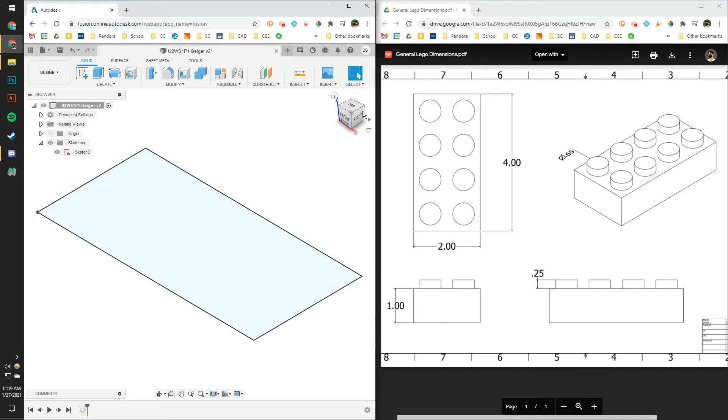And so we'll see now that if I zoom out, I have a 2x4 rectangle, and if I click Finish Sketch in the top right, it just looks like a rectangle. At this point, I'm going to click the house or the home button in my view cube section, and that's going to allow us to get an angled view, which is very helpful when we're considering a three-dimensional object.

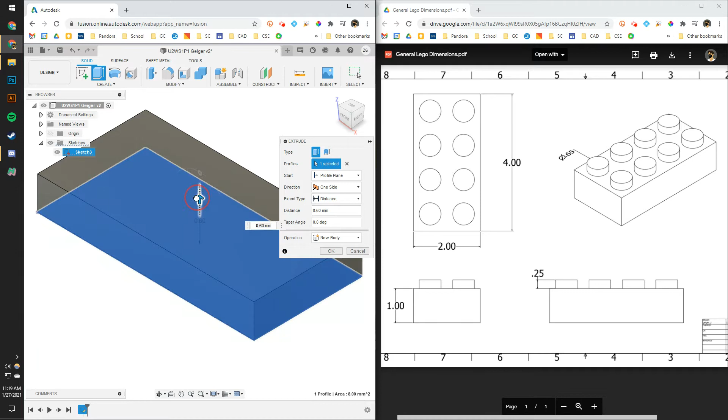Next, I'm going to click Extrude, which is probably the most used tool in this course. When I click Extrude, it's going to take that two-dimensional shape and pull it into a three-dimensional space. And so I can use this blue arrow to click and drag, or I can just type the number into this text box, which if I look at the drawing over here, the height of the Lego is 1. So I'm going to click 1 and enter, and now I have a rectangular prism.

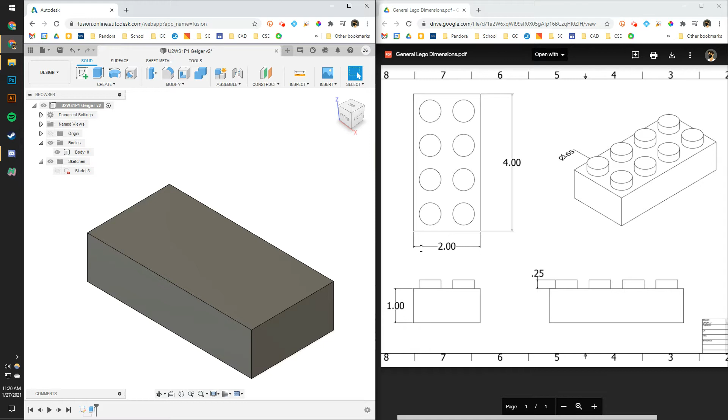The next thing we have to do is draw these cylinder bumps on the top of the Lego. And in order to do that, I need to draw all of these circles on the top before we extrude them. So unlike the first extrusion, now I'm going to right click on the top of my rectangular prism, because that part of the shape is where I want to draw this new sketch. And I'm going to click Create Sketch, and it's going to zoom me in onto that part of it. So I'm actually drawing on this level and not on the bottom on that XY plane like we started.

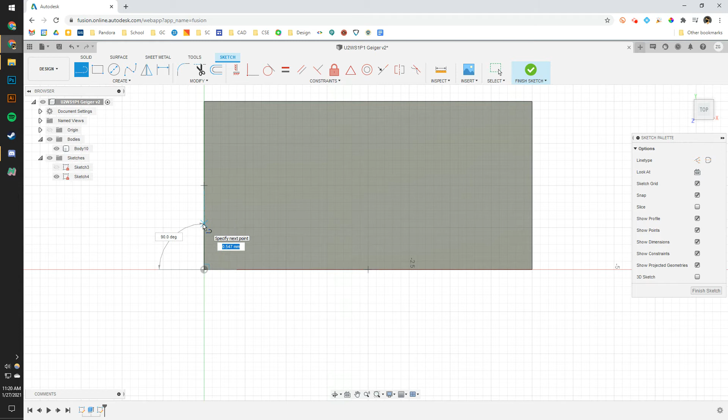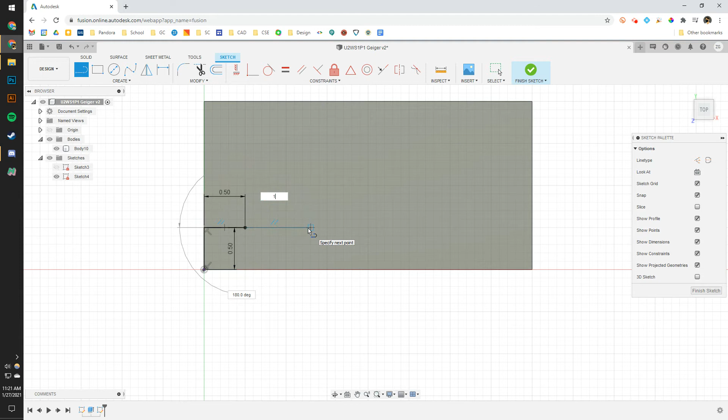So here I'm going to use the line tool, and I'm going to go 0.5 in up the edge of the shape. Instead of clicking the line tool, I can also type L, and that will make the line tool be selected for me. And then I'm going to go 0.5 inward as well. And then from the end of that line, I'm going to make line segments that are 1 millimeter long. I'm going to make sure that I move my cursor so that I can tell the program what direction I want the lines to go in, which is horizontally.

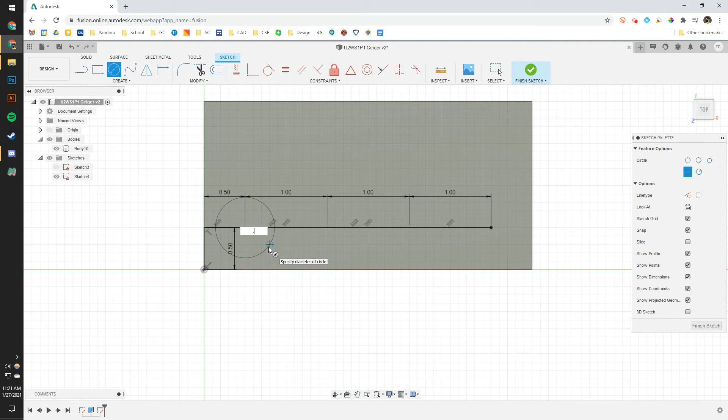Now, none of these lines are actually going to be extruded to make a three-dimensional aspect of the Lego, but all of them are going to help me plot my circles in the correct spots. So at the end of each of these line segments, we're going to put the center of the circle. And when I click the center of the circle, it asks me what diameter I want the circle to be, and for that, I'm going to click 0.65. So I can click the C key on my keyboard or click the circle button in the top left and make these circles. And I'm going to repeat that entire process on the top half of my Lego.

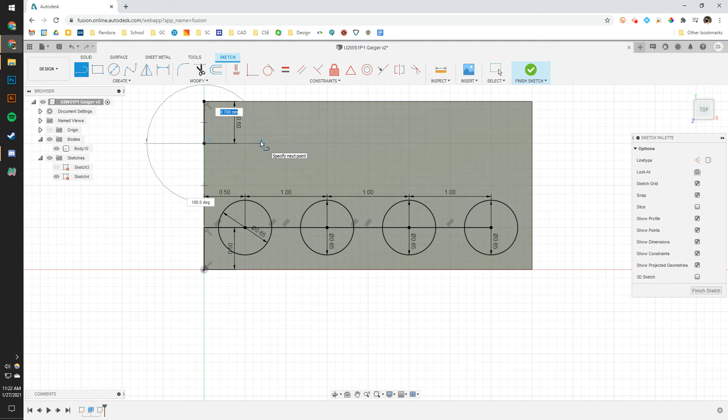So 0.5 from the top, 0.5 over, and then 1 over 3 times. Now see, I accidentally made a mistake there where this line is only 0.7 instead of 1. So if I double click this dimension, I'll then be able to put 1 into that space, and it'll resize that line. Now I'm plotting the circles again.

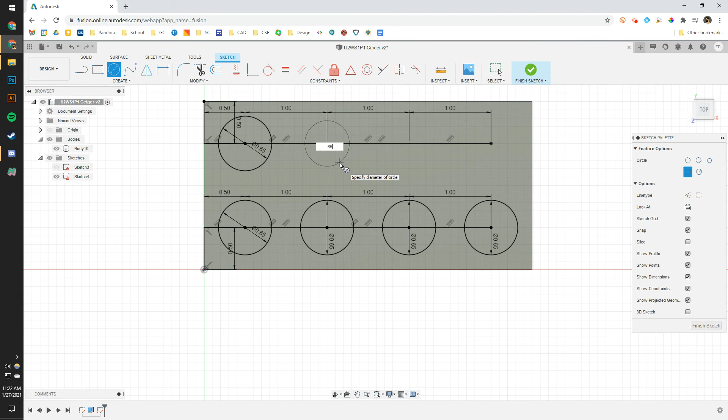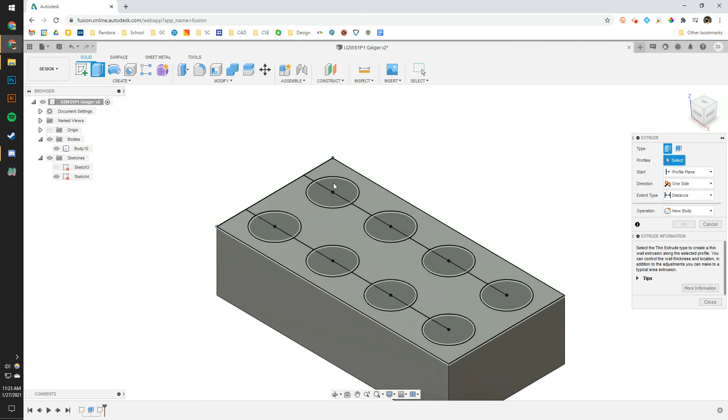And now that I have all of my circles, I'm going to finish my sketch, and I'm going to try to extrude. Now you'll notice that when I click the extrude button, it doesn't automatically provide an arrow to me, because now there are many different sections that I could potentially extrude, including outside of the circles. And so I'm going to select all of the ones that I want to give a three-dimensional volume to. And then I'm going to type in the measurement, which is 0.25. If I press enter, that will confirm what I typed, and so our block is finished.

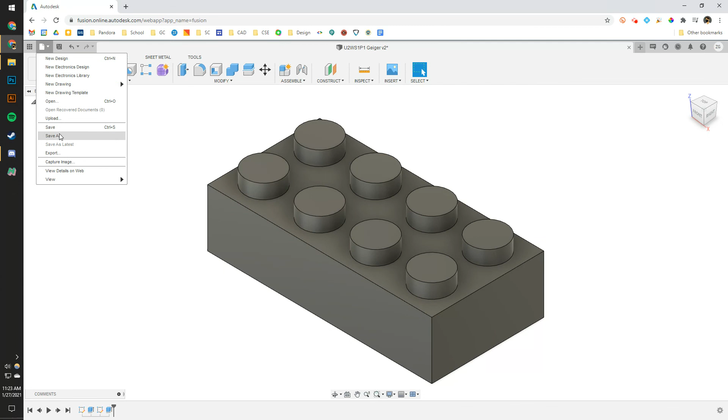Now to save it, we're going to go up to the top left where it says File and click Save, and then we're going to name it Unit 2 Worksheet 1, Part 1, and then you're going to put your last name in the name of this file instead of me. You can leave the default location as admin project, and then you can click the Save button on the bottom right, and that is all you need to do for this assignment.